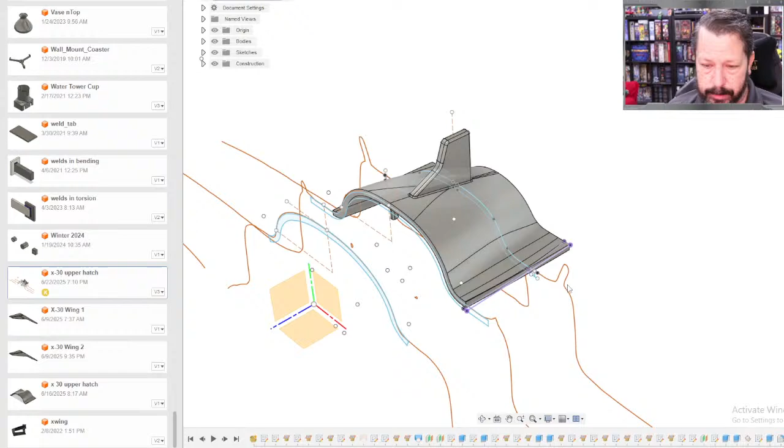So here's what we have. You can kind of see if I turn all of the stuff back on, there's what it looks like in the scan. So this was off. So I do have several profiles.

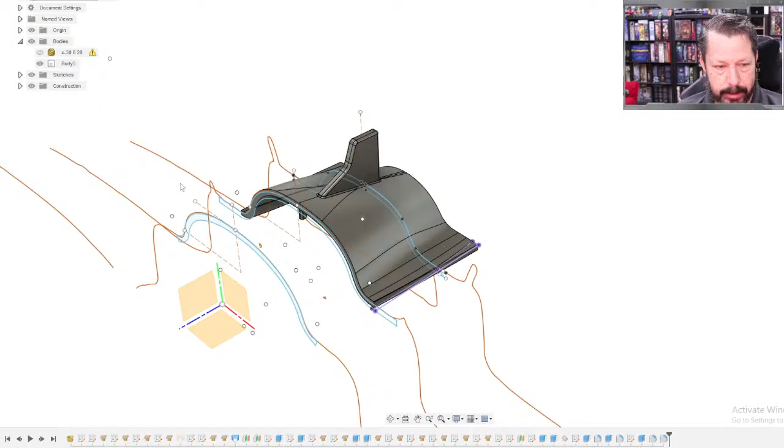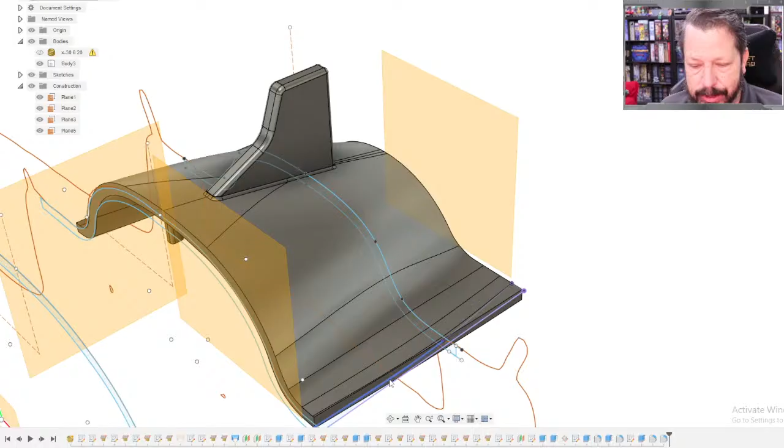Now I have chopped it down using a couple of planes to kind of chop it into size. Although it turns out that I didn't notice that these edges aren't actually straight. They're actually curved a little bit. So I had to go in and put this little surface right here to basically chop it at a curve instead of a straight angle like this plane would do.

I put the little wing on here. I had no guidance on that other than pictures, so I just kind of estimated what it looks like, and it looks reasonable. It's probably thicker than the original one, but that's okay.

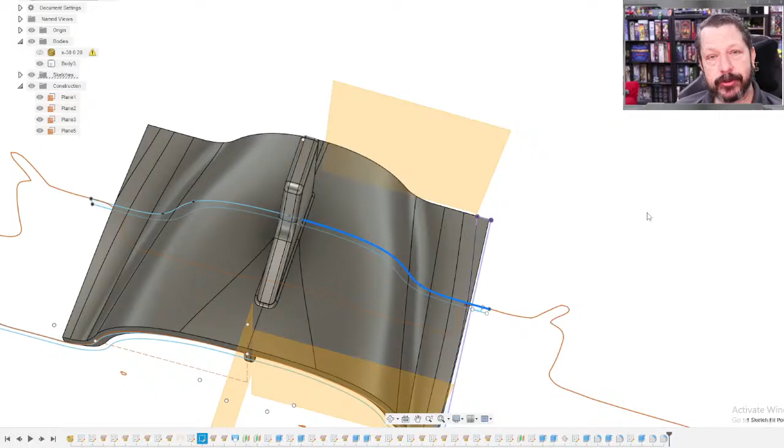And if I want to fix that bulge, then I added this profile. In the stream I was trying to do the profiles as a surface, and that worked, but when I went to make it thicker, to have some thickness to it, then it was not doing what I wanted it to do.

So what I ended up doing was the top line here - well, it selected the whole thing - but the top line of that is from the scan, and then I just offset it. I think I did 1.5 millimeters to get it the right thickness.

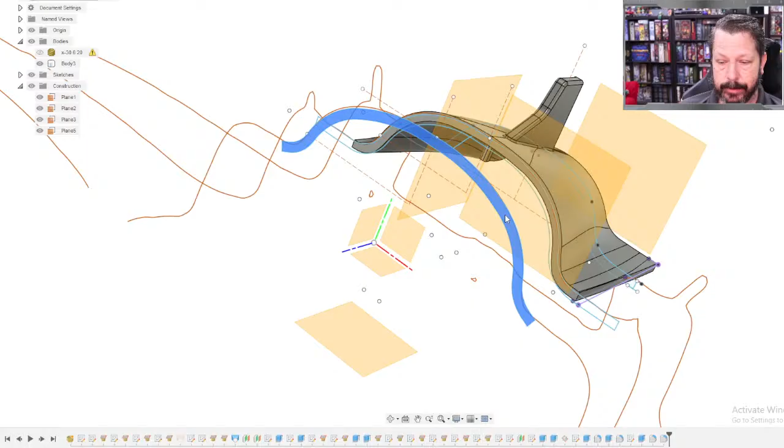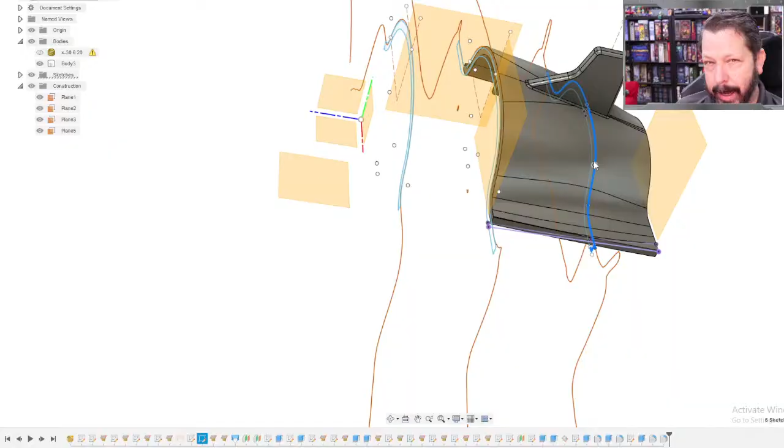And so I added this profile. Well, I can click part of it. There it is. I added this one just kind of by eye, and I went in and adjusted it - I could tell kind of what it should be just based on what the others were, and what the resulting loft looked like. But it looks like I've still got this point and this point a little too far out, and I need to manually move those around.

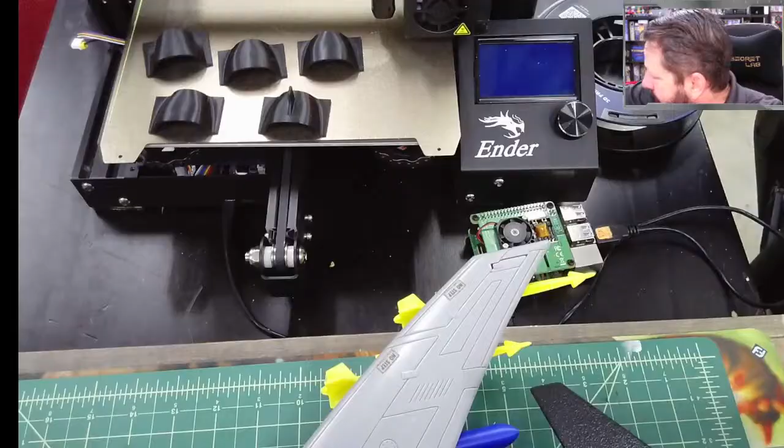So over here, there's the first one I printed, then got a little closer, the right size but no wing on it, and then I finally got this one to be where it fits and everything, but it's the wrong color, so I did reprint it in a different wrong color, but closer to the right color.

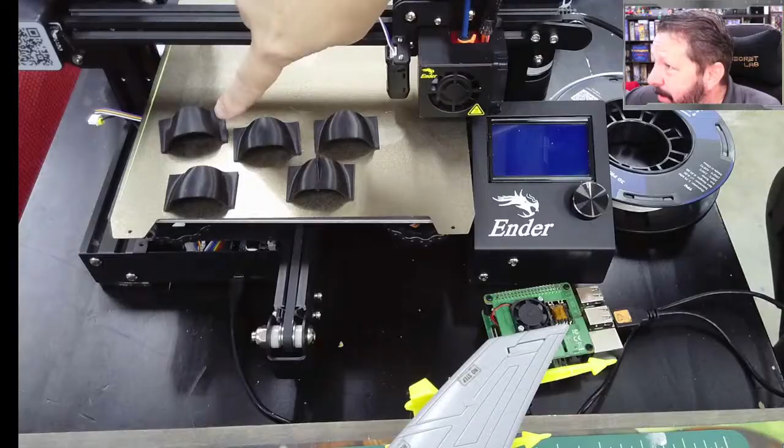So this is where we're at right now. It took about 5 iterations of going back and forth, mainly to try and get that right. You can kind of see there's a weird shadow in that groove, and then it starts getting better. One of these had straight sides, and then I had to curve it, then shrink it a little bit. So there's some iterating in there. Each print was only about 25 minutes or so, so it wasn't terribly long.

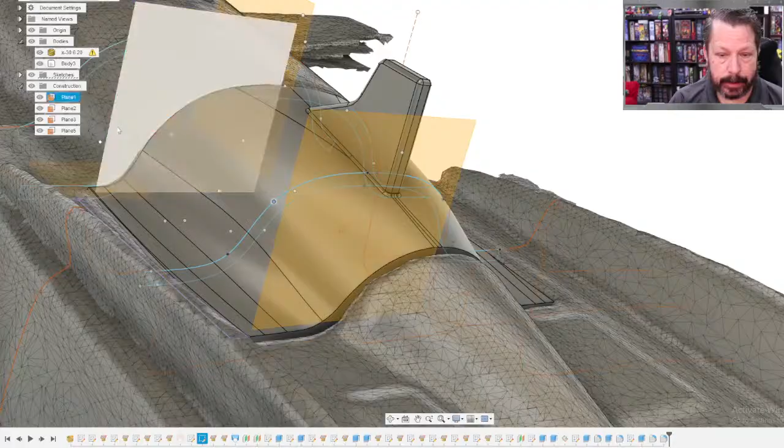So that was the process on that one. It was a bit more of a 'let's get close' approach based on having this scan data. You can see we've got the scan data for where that canopy is going to be too. It's a little rough, I might try using the more powerful scanner to get more accurate results. Just so we can see the difference, although there's a lot of detail here, there could be a lot more.

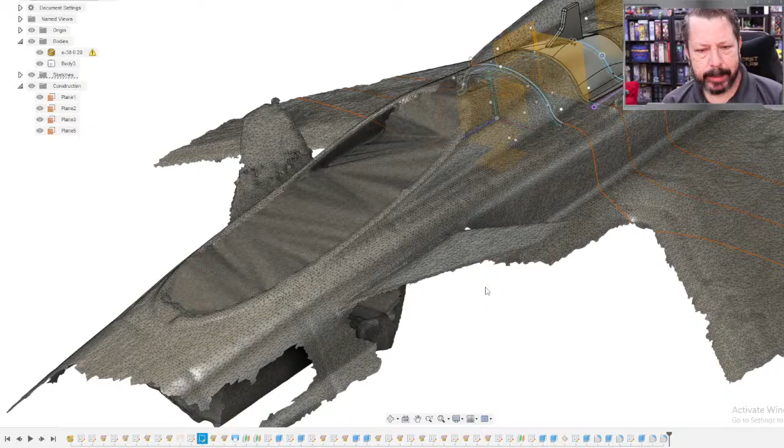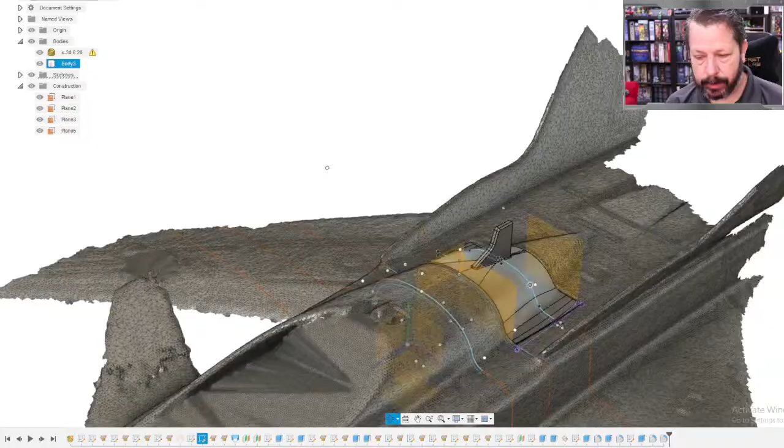That other scanner though, my computer struggles to run because it's collecting so much data at a time, and this computer is a little bit older - actually quite a bit older. So sometimes it struggles, but I might try to scan it and see if I can get a better scan, particularly for this area where it has to snap into the body. So yeah, not today, but offline I will go in and basically isolate this sketch. Which one is that?

16, I think. Go in and manually kind of move these points a little bit to try and get a closer shape to what I'm wanting, stuff like that, and see if I can get that bulge more under control.

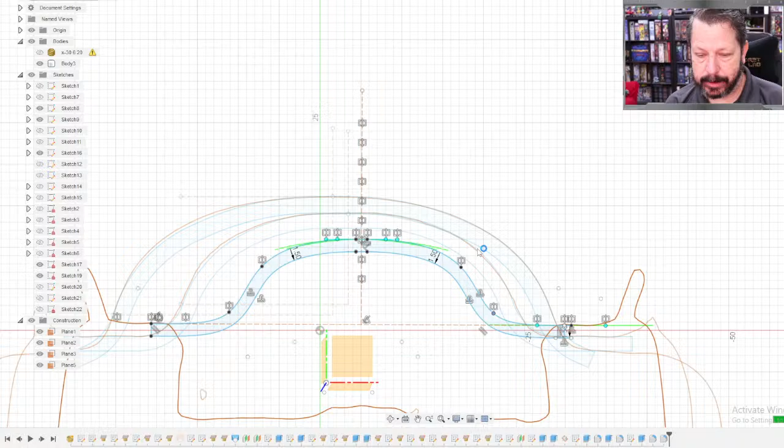Every time I do this, it's going to be a longer process because it has to recreate everything. So you can kind of see that bulge in this profile line, this curvature line I guess. If I could get it a little bit nicer, I think it wouldn't be so bulged out. Actually, that's not too bad, but you can see where these 2 points probably need to come in a little bit because there's a bit of a bulge right there.

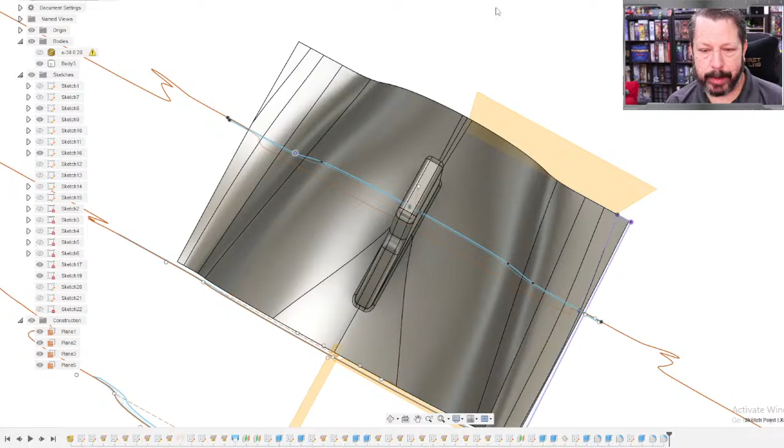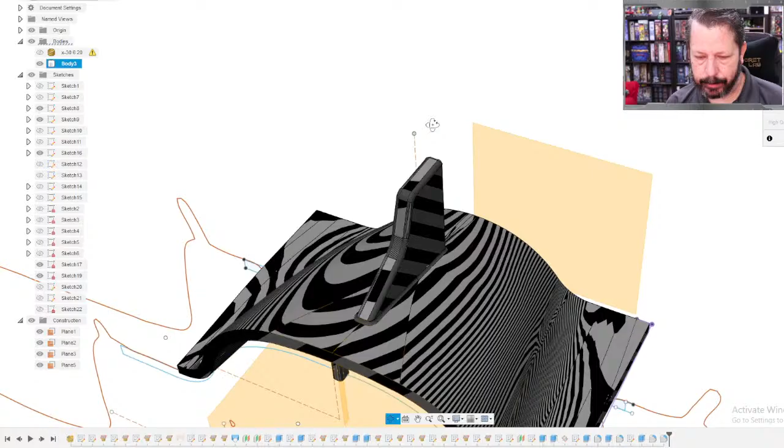When you're dealing with stuff like that, you have this inspect tool where you can put a zebra pattern on the body, which gives you an easier way to visualize it - looks like maybe horizontal stripes, though that didn't change the direction, they're in the same direction. You can kind of start to see what it might look like. I really wanted them to go the other way, but apparently they're not going to. Unless I can rotate the whole thing around. There are some tools you can use to see what looks kind of raised up right there - I think I need to move those points in a little bit.

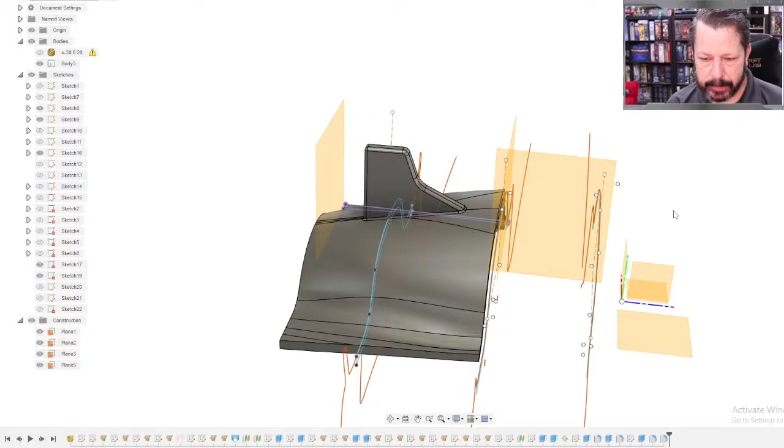All right, so we're not going to do that because that's going to be a lot of fiddling, I think. I don't want to just do that in the stream.

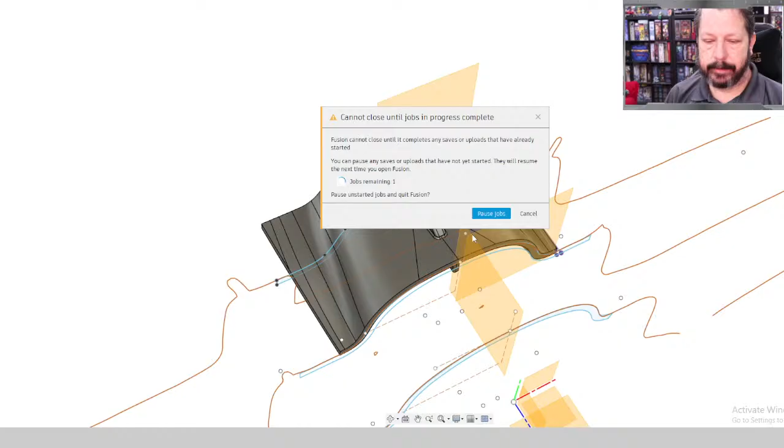But what we are going to do is check the chat. There's nothing over there. I'm going to close Fusion so I can get some of my computer resources back. It'll take a minute to close because it has to upload the save file since it saves in the cloud, so it's going to take a little bit. I think it's closing - there it goes. All right, let's go over here to look at something while it's going.

One couple things we do need to do - we did want to cover, what if you wanted to print a multicolor print but you didn't have an AMS, an automated material system that lets you automatically switch between colors without you doing it. I had shown, where is it at? I had shown this.

I had shown this guy, and it was a multicolor, one of the little flexi sharks.

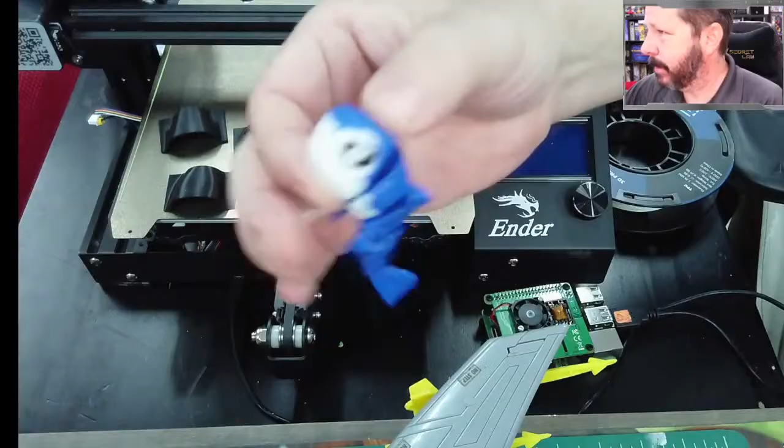This was all one print, but this was done on a machine that had a material switching AMS unit on it. So you could get multiple colors all in the same print, and you didn't have to do anything. You had to load the filament in once, and then it handled swapping out the filament.

So what if you don't have that? You can't do this kind of multicolor printing very easily if you don't have something that's going to switch the materials for you on an individual layer.

Either a machine that has multiple print heads on it - I've seen them with up to 5 print heads, and each one could have a different material, a different color, whatever. Those are on the more expensive side.

Or the AMS, where there are 4 rolls of filament and it automatically switches the rolls to whatever is needed at the time. That's what this one was.

There's another one I don't think is a thing anymore. It was kind of finicky, but it was one box you added to your printer, and it would splice the filament together - cut it, weld it together with heat, and send it through the nozzle at the right time. Whenever it needed to switch filaments, the new color would be welded onto the old color. That machine was called the Palette, and they had maybe 3 iterations of it, and it did work, but it required a lot of synchronization between the new filament coming in.

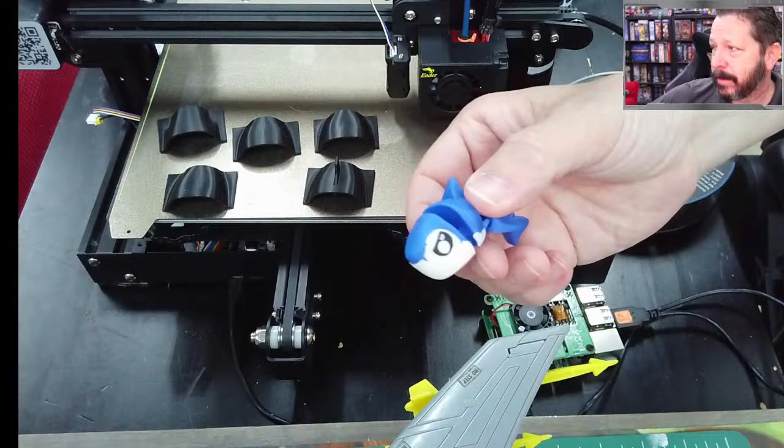Well, it's all one string of filament, just patterned into whatever color needed to be there at the time. It required a lot of synchronization, and it was a little clunky and a little expensive. With this printer, you could get it with the AMS for the price of that one add-on for another printer. So I think they kind of abandoned that approach and switched to approaches like this, where one unit houses your rolls of filament and sends them at the right time, or the type of printer that just has multiple heads.

But let's assume you don't have any of that. You can still get some types of multicolor.

Here I've got a little step-by-step for how you can make your own multicolor if you only have a single nozzle printer. This works best with things like logos or text on a plate - you know, you're going to print a nameplate or something. It works best in that kind of thing.

You find the image you want to convert or create the image, and again I'm going to use Photopea because I don't think it's open source, but it's free to use, it's online, and it's mostly like Photoshop on the basic level tools anyway.

And we're going to vectorize it again, because the process I'm going to do is drop it into Tinkercad. Again, you can use other processes - this is just one way to do it.

So we're going to get that SVG file - the vector graphics format - and bring that into Tinkercad, make a 3D design, and import the SVG that we created in Photopea. We'll have to rescale it because there's no real scale that translates from a picture to an SVG file.

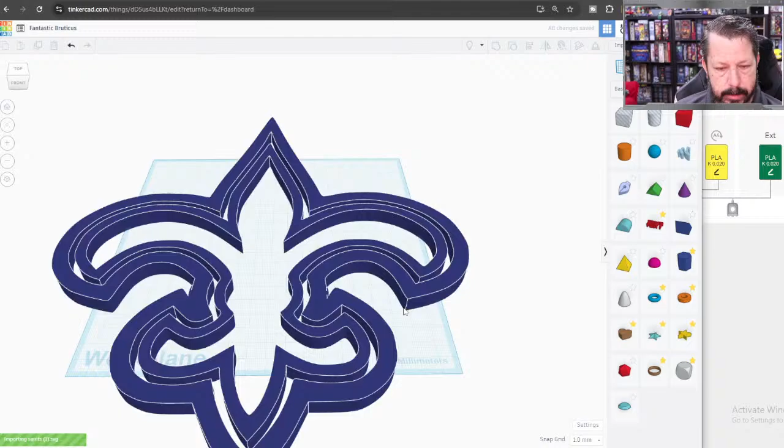Import, and we're going to find that vector file, which is this one. There it is. And again, you could try to size it, we're not going to worry with that. So yes, it is way too big. So we're going to select it, hold down Shift, and kind of manually get something more reasonable.

We'll also be able to scale it in the slicer if we want to, depending on how big we want this thing to be. So this would be kind of interesting to print by itself, but all the places that there are no material is just kind of empty, so it would really just be an outline.

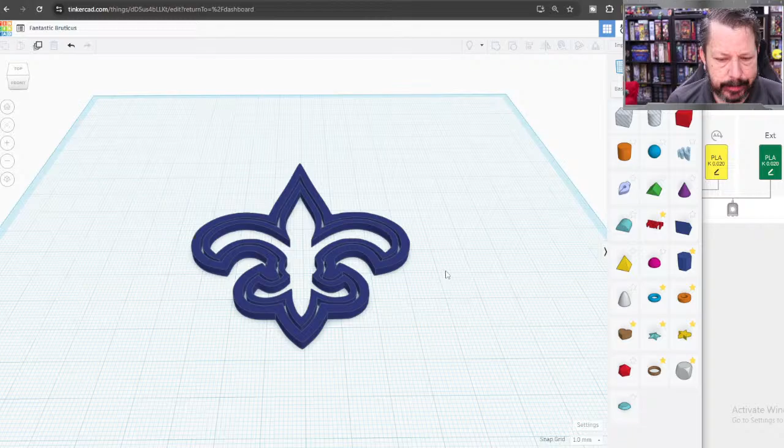So to fix that, we'll select it. We will duplicate, which is Control D, or I think maybe this copy, I guess that's also the same thing. We're going to do duplicate though, Control D, so that's basically copy and paste. Now there's 2 of them, they're on top of each other.

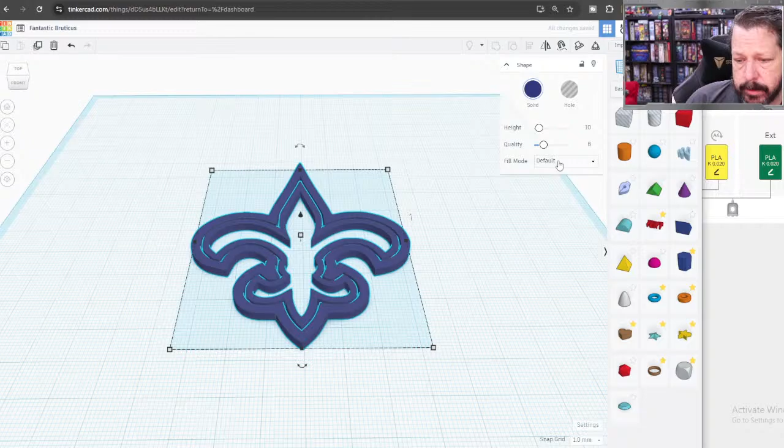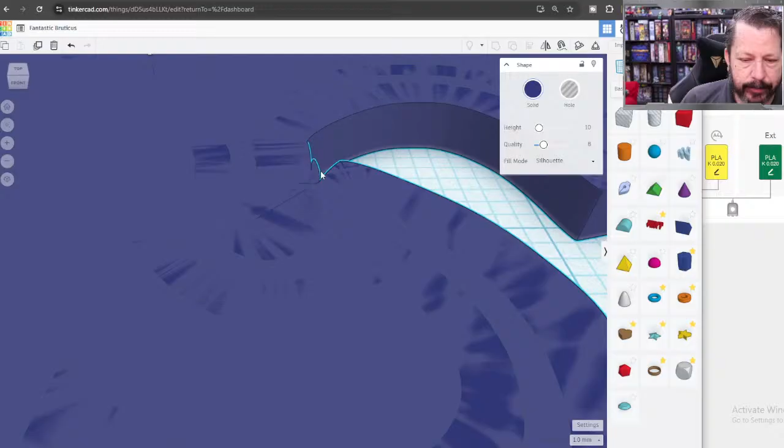And that second one, in the fill mode, we're going to change that to silhouette. There's several options here, and what that'll do is take only the outside part, and everything inside is filled. Now I see I've got some weirdness, a little jaggy thing right there. That's an artifact from our vector conversion. Maybe we could have fixed that, but I think it's so small it won't matter.

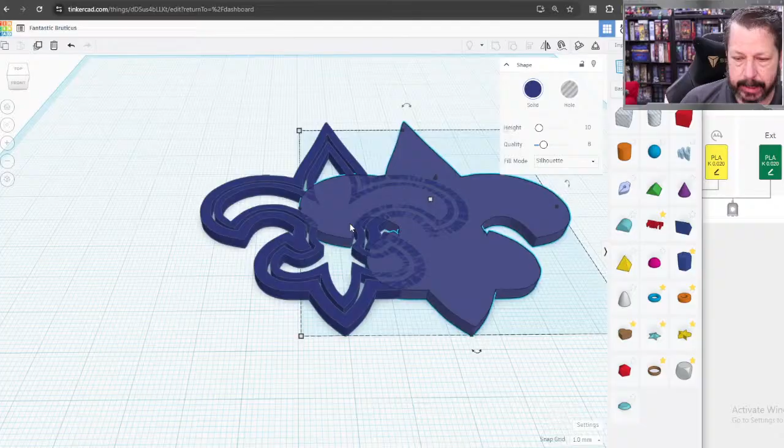So now I've just got one big blank, but I could go in here. Actually, there's the two of them, two things stacked on top of one another. One is the solid, and the other is the outline. Let's line them back up and make them...

I am going to print these, and I'm thinking I'll print them at 0.2 millimeter layer heights. So let's make this, instead of 2.64 tall, let's make it something reasonable for an even division by 0.2. So I'm going to make it 3 millimeters.

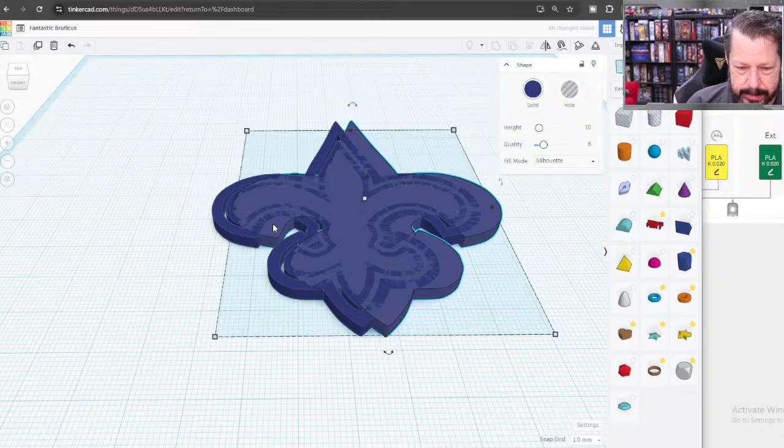And then let's pick the one that's solid. Oops, let's unselect them. Let's see, that's the solid one. Let's make it also divisible by 0.2, since that's our layer height we want to print at. Let's make it something smaller, 1.6.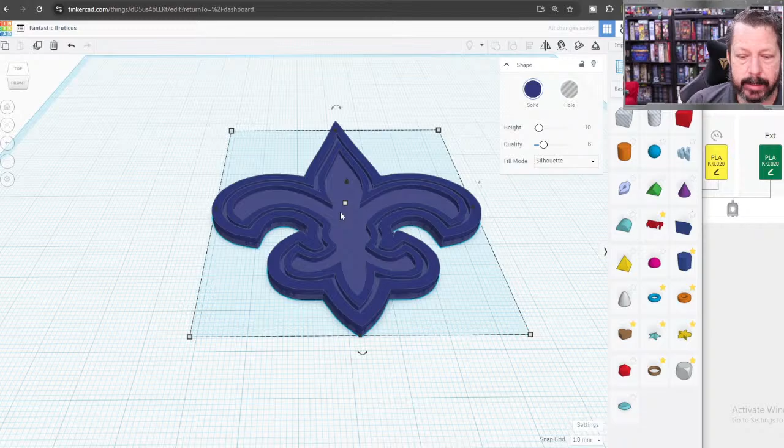And now when I line them back up, that's kind of what I'm thinking I'm going to get. If I change the colors, let's say this one is maybe a black color, and this one is a gold color. So somewhere in there, when I line them up, that's what my print's going to look like.

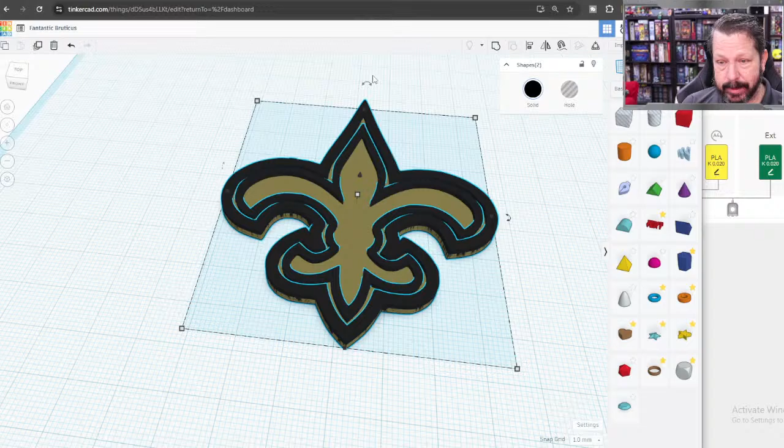Right now they're two separate files, so I am going to Control A to select everything, and then I will group them. This will turn them all the same. Oh no! Yeah, it changed them to all the same color, and that's what it will look like.

Now we can export that as an STL file. Oh, I should have opened Cura. I haven't opened Cura. Let me get it going.

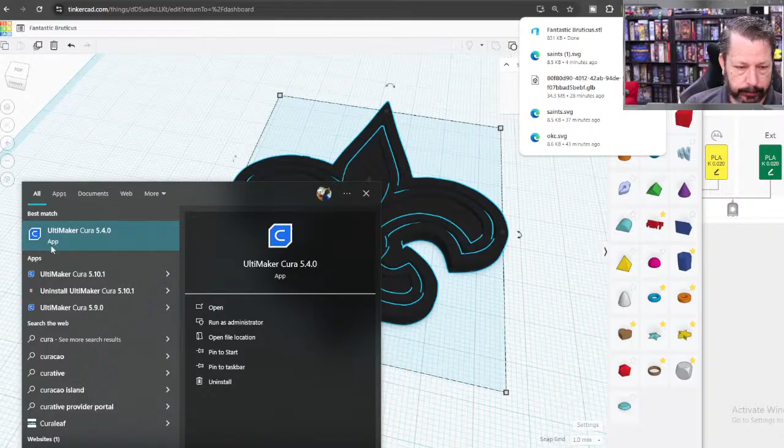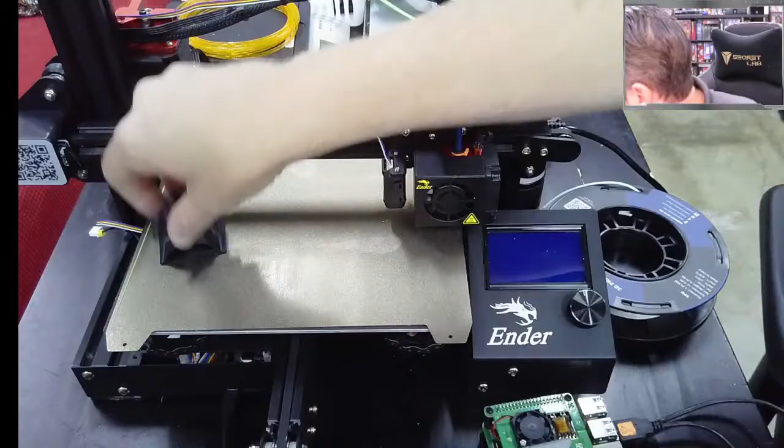Let's prepare it to actually print. Now my printer over here, the print material in it is broken, so we're going to have to unload that, plus it's green, which is not really one of the colors we wanted to print. I don't know if I have a filament that looks like it's going to work here, but all of them will work, though some of them will not look like the Saints logo.

So we'll get that running and we'll change out this filament. Cura is still loading.

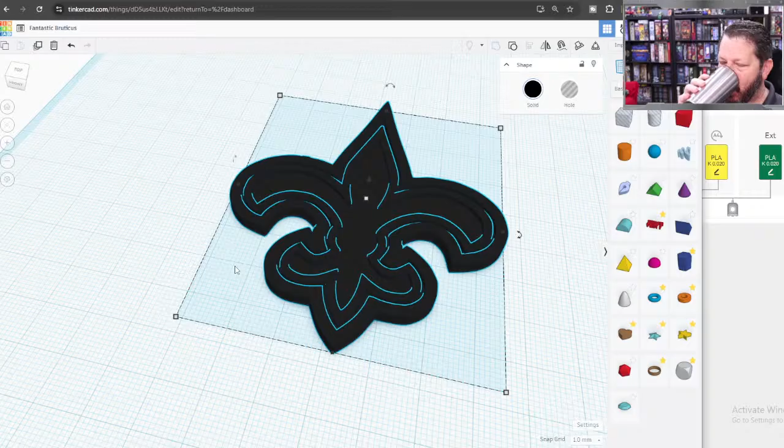All right, apparently we can update. We will do that later.

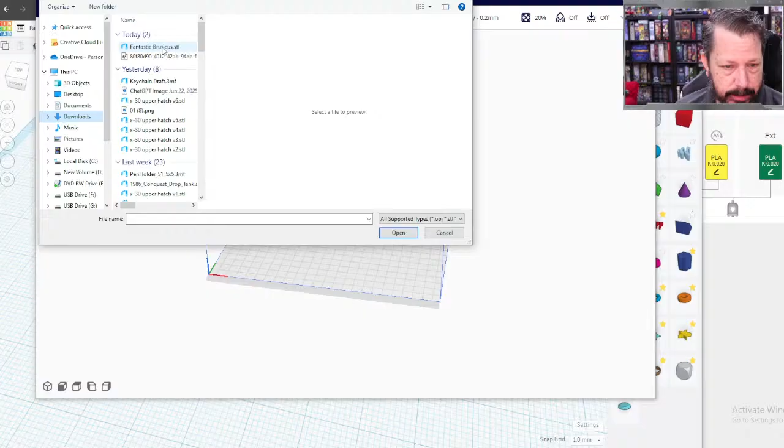So here we need to bring in wherever I saved it. I don't even know what it was called. What did it call it? Fantastic Bruticus, we got to find Fantastic Bruticus. Must have put it in downloads. There it is. All right, so there's our little print.

Let's make sure we're actually printing at 0.2, because that's what I was thinking when figuring out how thick to make it. This size looks kind of reasonable. Two walls is fine, top layers of three each is fine, infill is also fine, that's a PLA temperature. We could probably print a little faster, but we'll leave it there. It does need cooling because it's PLA, and we'll use that skirt. So that looks okay, let's slice it.

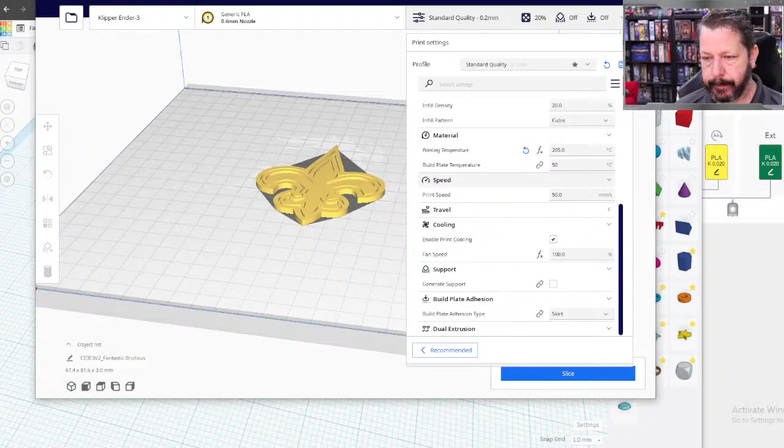And preview. It says it's going to take an hour. Let's preview it. And this is what... oh, I think ironing is turned on. Let's turn that off. Ironing would be interesting, but it's just going to make it take even longer. So now let's slice it.

So 51 minutes, all right. So if we leave it like that, it's going to print our 15 layers, because we wanted it 3 millimeters tall with 0.2 millimeter layers, so that's 15. Now the first layer is layer 1 — that's going to be important later on. There is no layer 0 in Cura.

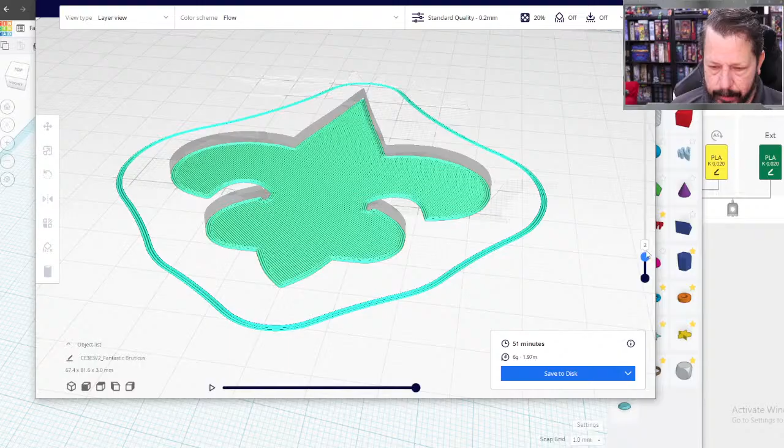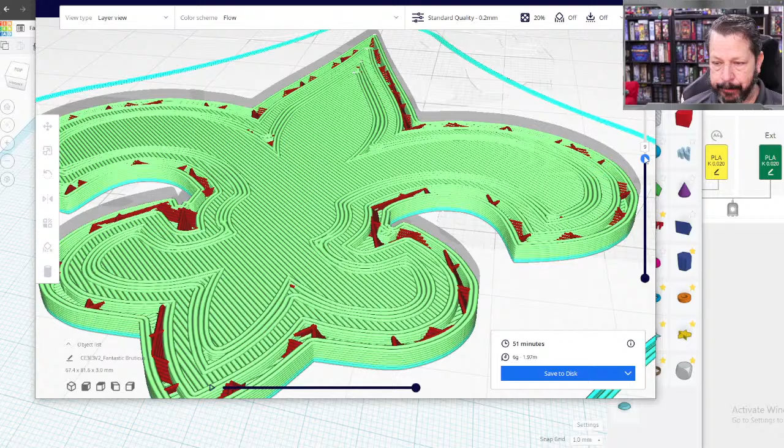And then what we're looking for is where it starts printing the other color. So it looks like right there is the first appearance of the other color, that little line. You can kind of start to see where it's doing the raised part. So that's at layer 9 if you start counting at 1. Layer 10 through 15 are just the rim on the top.

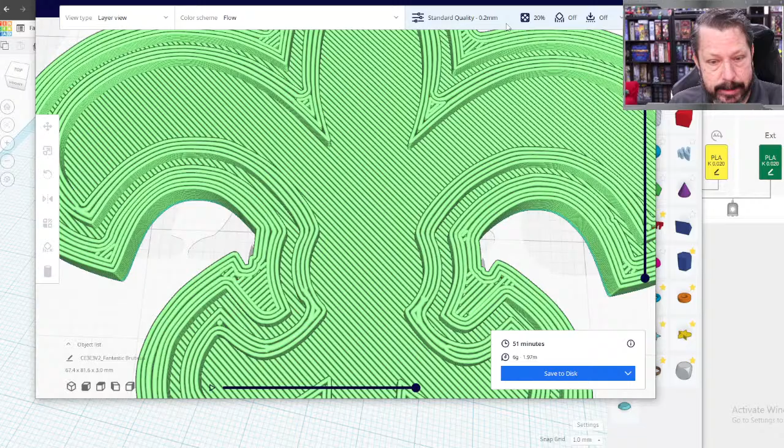If for some reason you have some features that are not being picked up - I don't really have any really thin features on here, but maybe you've tried to write some text and it was kind of small and it doesn't slice - what you can do is look for the word thin in here, and there's this option, print thin walls. Select that and it will force all the stuff to be printed even if it's smaller than the slicer thinks.

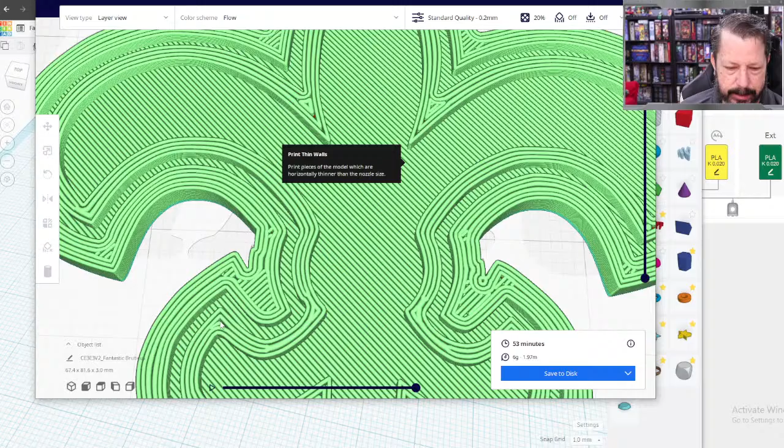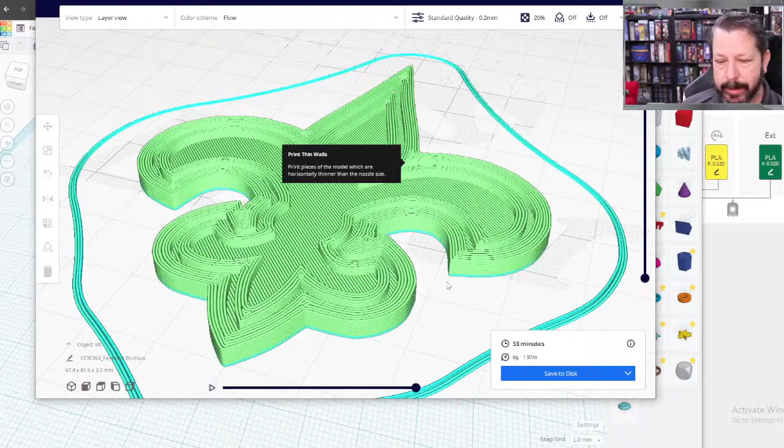The printer can actually do. So in this print, it doesn't really change anything. There might be some differences in these corners possibly, but sometimes you've got features that are too small and they don't show up in the slice, because they're smaller than your line width. So if you're having that issue and you want those to print but don't want to change the line width, look for the print thin walls feature and that should pick them up.

I don't think I need it on here, so I'm going to turn it back off. In general, you don't want it on, but sometimes you have to have it to pick up some of those thinner pieces. Alright, looks like our printer might be ready.

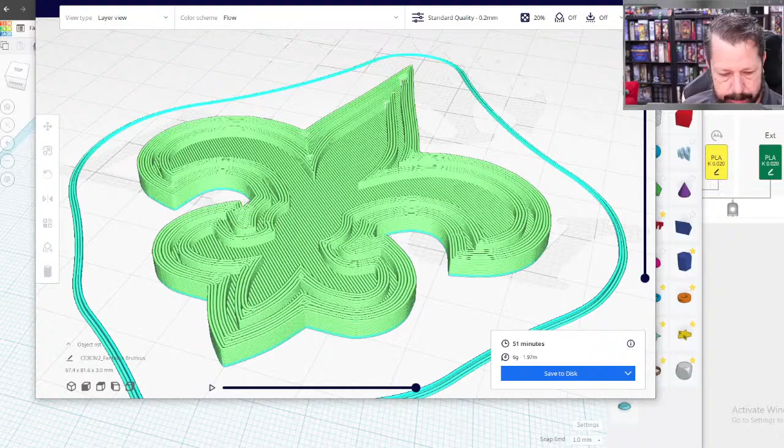Let's see if we can get connected to it. Remember, this printer's running Klipper, so there are some things I can do on the printer panel itself over here, like I could go ahead and change the filament temperature here so that I can remove it.

Well, let's see, we'll just do it here. There is a preheat PLA, but I'll just manually change it to something that will melt PLA. Oh, hold up, I've got to connect the printer.

While it's heating up, let me quickly see if we've got some filament that will work as far as colors go.

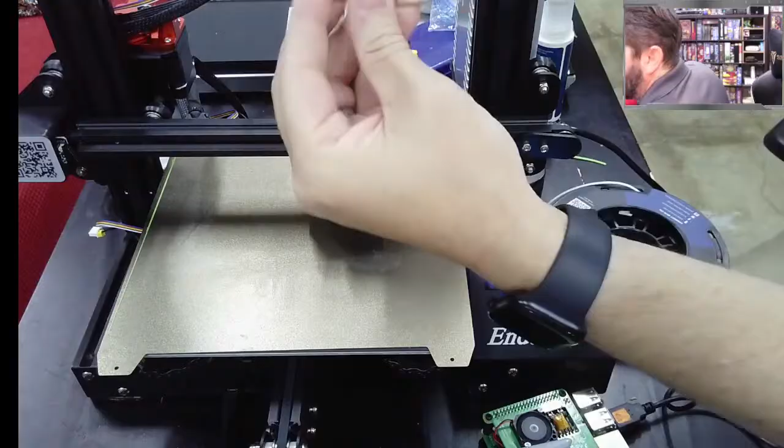Let's load up this. So typically what I do is on the end where we're at, on the end where I'm loading, I'll cut at a pretty steep angle, something like that, to give it a sharper point that makes it easier to get into the feeder.

Alright, now let's extrude, I don't know, 50 millimeters maybe. Actually, let's move the Z-axis up some, so it's not sitting right on the bottom. There's green in there, and still green in the nozzle, and I want to purge a lot of that green. Alright, you can already see, I don't know if you can see on the camera or not, I can see in person that there's the silk color coming out. So we'll let it purge a little bit.

Now we're not ready to print. We actually haven't even sliced it yet. Or well, we did slice it, we didn't save it. So over here, right now, we could download this, save it to disk, which we're going to do, and we'll save it on the desktop. Let's call it something that I can recognize, though.

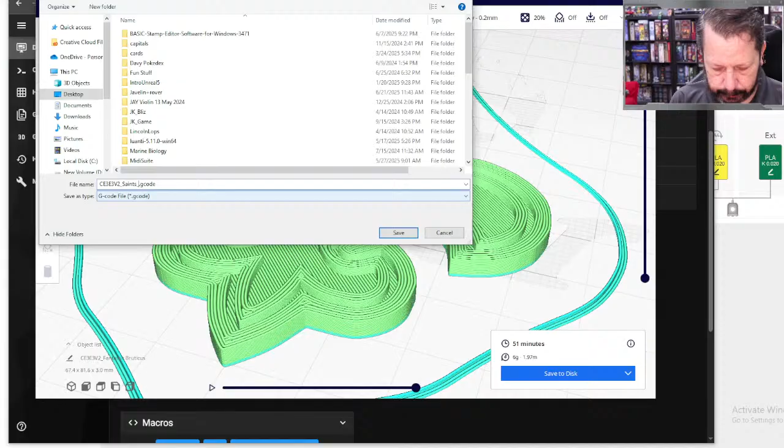And this is the G-code file. Okay, this does not tell it anything about changing filaments. There are extensions that will let you go in and they will add in G-code, although all the ones I've ever tried for this process don't always work. Like they use a G-code command that the software doesn't recognize or whatever.

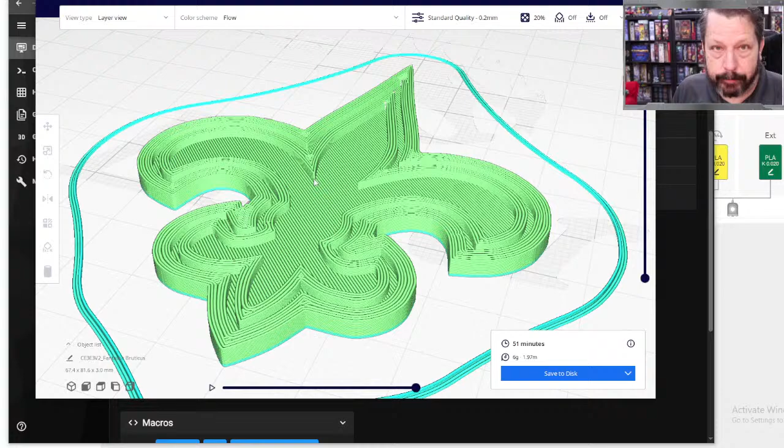Yeah, so yes, PLA. So it's funny you mentioned syrup. The comment, in case you didn't see it, one time when I was changing filaments, my printer started to smell like syrup. It was going from PLA to PLA. PLA is made from corn, and it does have a syrupy smell, like corn syrupy smell. So PLA, polylactic acid, one of the main ingredients is derived from corn, and it will smell like syrup.

Sometimes it smells like an oil type of thing, like corn oil or something. So it's not bad. It probably means it's extruding really fast, or you've pushed a lot of filament through, so you're getting more of it at once. But no, PLA kind of does smell like that. In fact, I noticed, and obviously you can't, because you can't smell what I smell right here, but this smelled that way too. So no, it's not bad. That's kind of normal for PLA.

So there are, like I was saying, extensions that will, you can just click a button and it will add the G-code to tell the printer to change colors. Like I was saying, those tend not to work for me for whatever reason. Maybe I don't use them the right way.

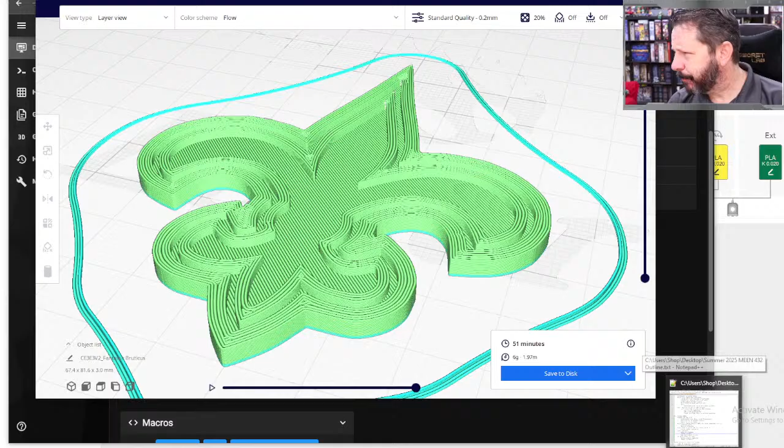So what we're going to do is go into, I just saved this to the disk somewhere, so on my computer. We're going to load that up as G-code as a text file. I'm going to use Notepad. Let's see. Let's open it. I'll get it on the screen in a second. I just got to find it. Where I put it.

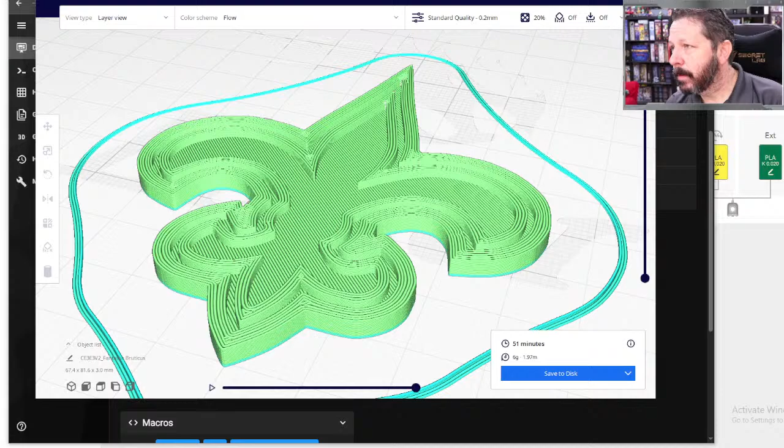Oh yeah, it started with CE3E3V2 Saints logo. There it is. Okay. Yeah, we're on the screen. Oh, there's another comment.

Smells like pancakes. Yes, it really does, at least most PLA does, except for the yellow. The yellow to me smells horrible, and it's a little obnoxious. Anytime I print yellow, I move it away. I assume that when they make filament, it's pellets of plastic, and to color it or add features to it, you add different pellets, so the colorants, and they're super saturated colors or whatever. So you might add one pellet of colorant to, I don't know, 1,000 pellets of base plastic.

I don't know what the ratio is, but for whatever reason, the yellow colorant is not one I like to be around when it's printing. The others tend to smell like syrupy oil kind of stuff.

Here's the logo G code, so you can actually read this. It's maybe 50,000 lines of code, but it's all readable. G code is stuff you could technically write yourself. All of these with a semicolon are comments. Then some of these are labeled with M instead of G. The M's are typically machine codes, telling the machine some kind of setup thing, like heating to a certain temperature or displaying a message. The G codes are telling it to go to a certain location, and they're when the print head is moving around for the most part. That's kind of how the G code is set up.

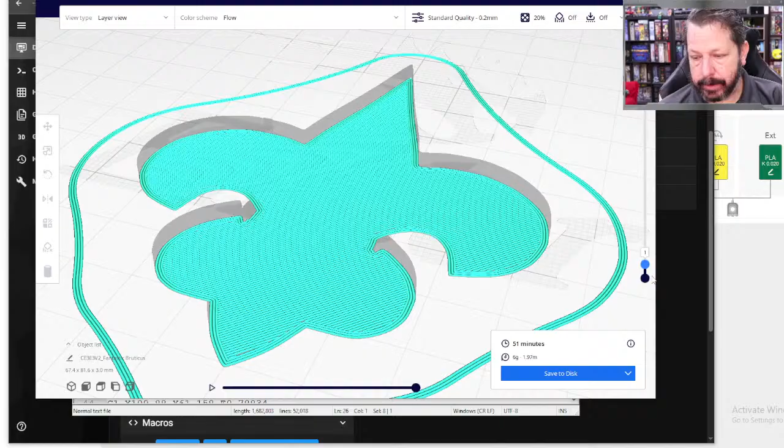Here are our 15 layers. Here's one detail: when we were in Cura, we scrolled to the first layer and it was labeled layer 1. But in the G code, the first layer is layer 0, so things are off by one layer.

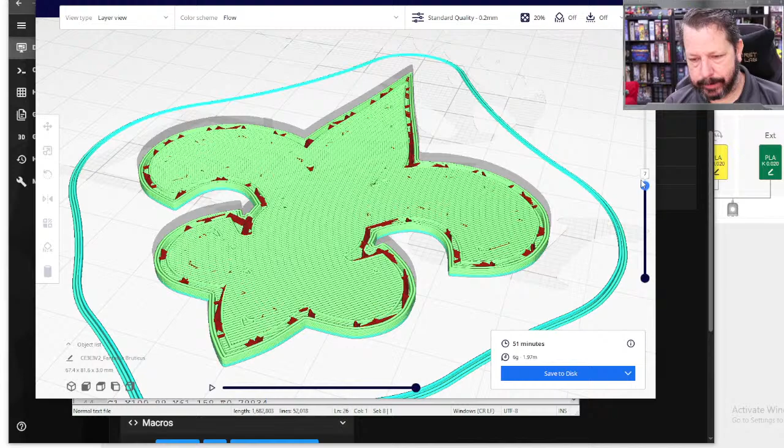We wanted to change at layer 10 maybe. Layer 9 looks like it starts, and layer 10 is definitely the other color, so maybe we'll start at layer 10. Since layer 10 started counting at 1, in the G code that's layer 9. We could scroll until we find layer 9, or do Control F and look for it. There's 2, 3, 4, 5, 6, 7, 8, 9 - so that should be where we want to switch, since we started counting at 0 in the G code.

So there's layer 9. Before we print layer 9, all of this is telling it to print the different things for layer 9.

What I've got is on Canvas. Over here, I've got this code already written, and this is kind of generic code for Marlin, the firmware your printer's using. If you have access to Canvas, you can just cut and paste this - it's on today's class thing. Otherwise you have to type it in. We'll paste it in right here and separate it out. Now it's formatted way differently, but we could clean it up just to make it not quite so weird looking. The formatting doesn't make any difference at all - well, it would make a difference if I erase the comments or the comment semicolon. I'm just trying to get it all... not that, got in too big of a hurry.

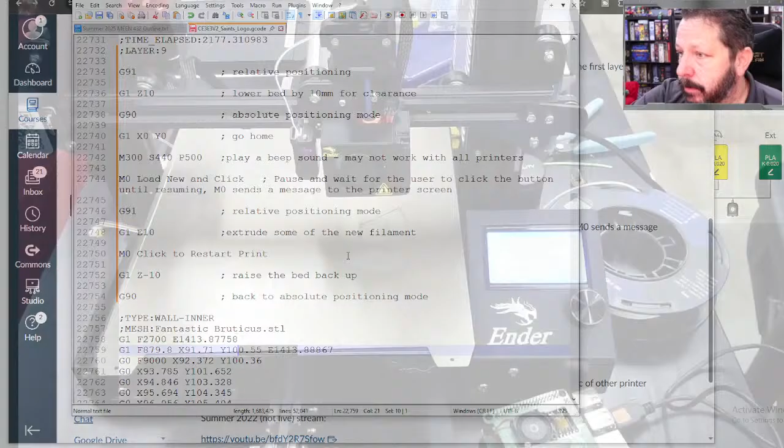You could alternatively sit at your printer, wait for it to finish as much as you think it needs to, and then in the menu there's a change filament button, and you can just wait for it. The only problem is you have to be sitting there watching it and hoping that you catch it at the right time.

So back over here, we just inserted this for our change filament, so we could write a little comment: change filament.

Save this again. I am working in Notepad++, but you don't want to load your G-code into something like Word or WordPad or an actual word processor, because when you save it, it's possible it will add in all sorts of meta tag data, like when you saved it and who the author was. That's going to really mess up the G-code, because the printer doesn't know what to do with that stuff. That's why I'm working in Notepad++. Notepad would be just as fine, but I recommend Notepad++ because you can do a lot of other things with it.

Editing code, if this were some language, it would be formatted more like code versus just G-code, which is more or less straight commands.

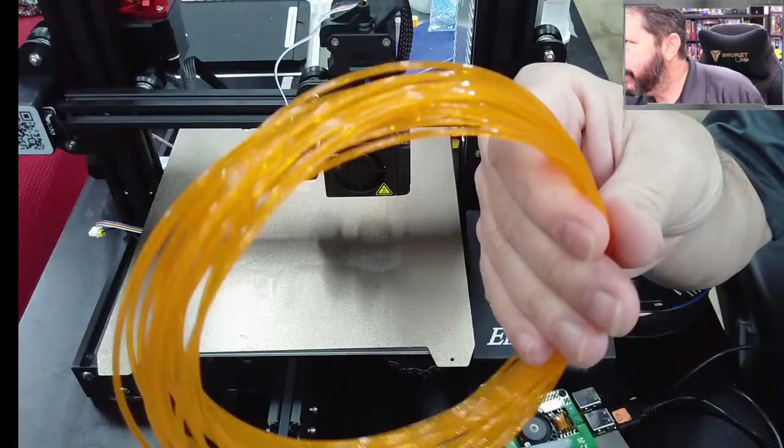So in the meantime, let's look at this - I wanted to show this filament here. This filament is just a little sample, and it is sparkly. Let me see if I can focus on it. I don't know.

Yeah, maybe you can kind of get the idea. There's glitter in the filament. So these are pretty cool, they come out neat and all. They're usually PLA, some of them are PETG.

What I want to say about this one, though, is that if you're printing filament with glitter in it, we've already talked about the hardened nozzle thing, but these filament types with glitter in them, you almost definitely want to switch to a larger diameter nozzle. This one has a 0.4 millimeter nozzle in it right now. I'd be hesitant to print this kind of sparkly material on that size nozzle, because it's too big of a risk of the glitter getting hung up in it and not extruding. So if you want to print them, they're pretty neat filament types, but switch to a larger nozzle, 0.6. We did a nozzle change a couple weeks ago, so you can go see how that works.

Not sure what my printer's doing. It just stopped right here. It may have already run into some G-code it didn't like. I don't know if it pre-processes it, and I think it might have.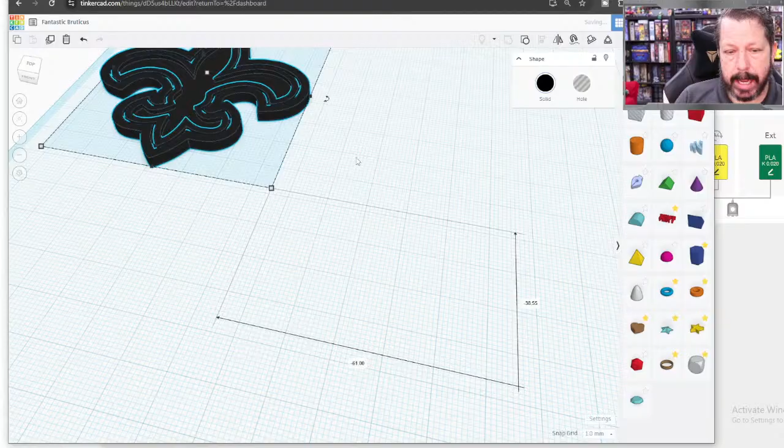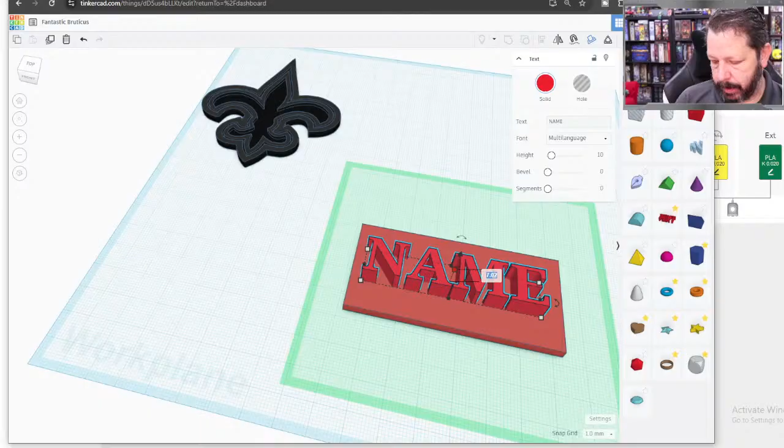All right, while it's doing that though, I did want to show you this. Maybe you don't want to copy a logo, you can just do in Tinkercad, you know, manual, there's 3 millimeters, make it whatever size you want. There's a text tool, and you can just put whatever text you want on it. Make it however thick you want it to be, maybe another 2 millimeters. And you can center these things. Here's the little align tool, center and center. And group them together, and so you can make your own.

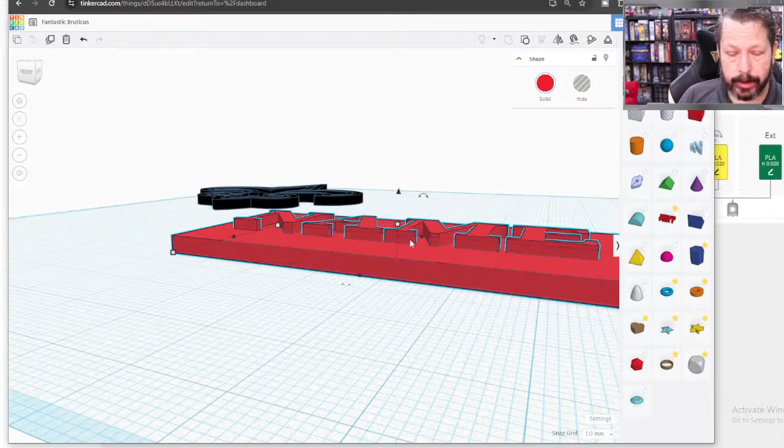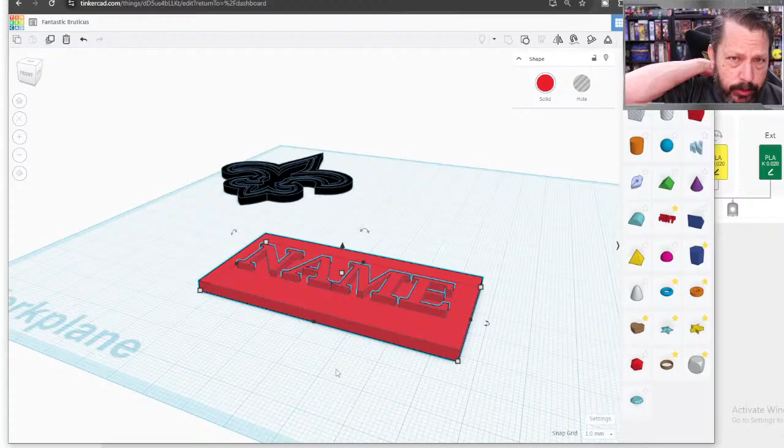The main idea is that you've got different levels of where you can change filament colors. There is one other tool that I'll show you later, not later today, but later in the future, that will print very multicolor things, but it's a little more setup. It's called HueForge, if you want to look at it ahead of time. But, well, I guess we can search it now.

The other thing I wanted to show you, I don't know if you've messed around much with any of the AI mesh generators. You've certainly done an AI image generator at some point, or at least seen them, but there are AI mesh generators too. Maker World has Maker Lab, and some of these you can make little Pokemon style monsters, or make a statue from a picture.

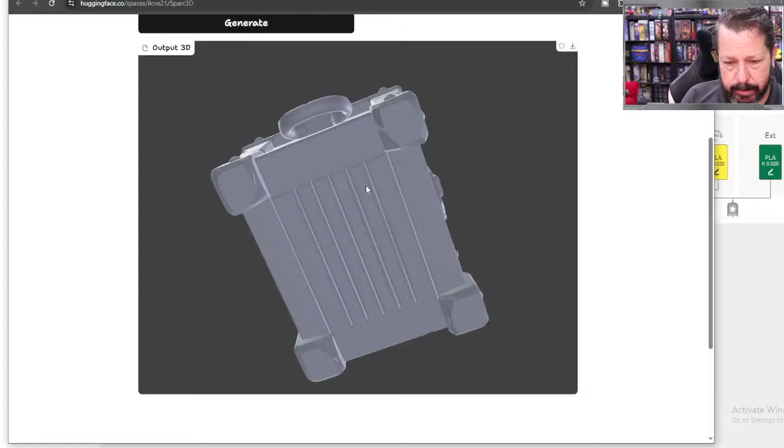So this image is just created from maybe ChatGPT, I think, is the one I used. I asked it to create an image of a treasure chest on a white background, and that's just what it spit out, in a fantasy environment. I don't remember the entire prompt, but it spit out this picture. Then I loaded this picture into Sparc3D, and this is the model it generated. That's a really nice model.

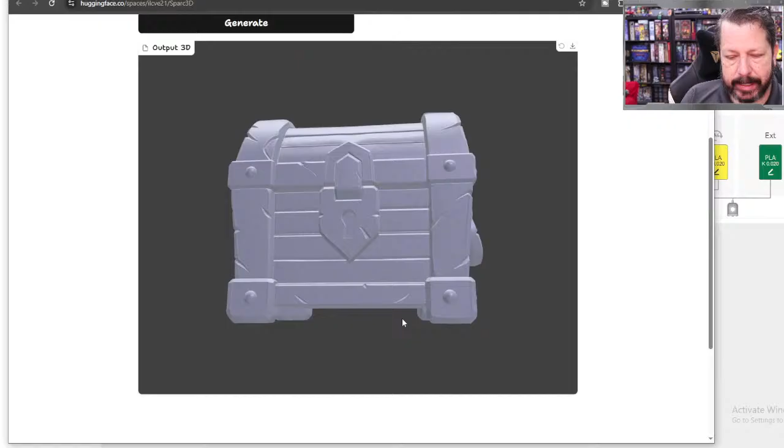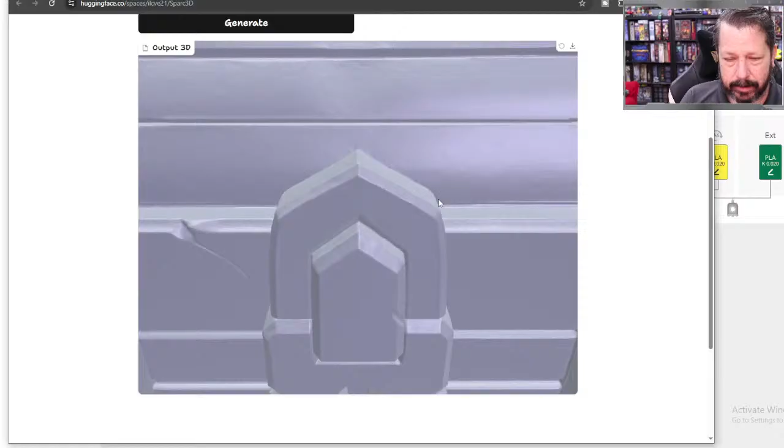It's not 100% printable—like, you've got this little buckle over here, the handle, that would be hard to print, you'd have to change that. You've got these feet, which look neat, but they make the bottom raised up, so that's not ideal for printing. This little overhang right here probably is going to droop, so it's not set up 100% for printing well. You'd need to modify it, but that's a really good model—it even picked up some of the texture for the wood in there. So this is a pretty high quality model.

Right now it's in the kind of beta phase, or alpha phase maybe—probably beta, I don't remember what it said.

The general process is you create some image, ideally on a white background so it's not getting confused. What these do is—I talked a little bit about photogrammetry, where you take a bunch of pictures. I showed you the Lady of the Mist—I took a bunch of pictures around it, and the software used all those pictures to figure out what the object must have looked like from all these different angles. So what these are doing is taking one picture, then using AI to generate the other pictures, and running that through an algorithm, sort of like photogrammetry.

Now this one is more advanced. If you read the whole paper, they talk about what they're actually doing. But this one is giving you a lot more detail than any of the other ones currently, and it looks pretty nice so far.

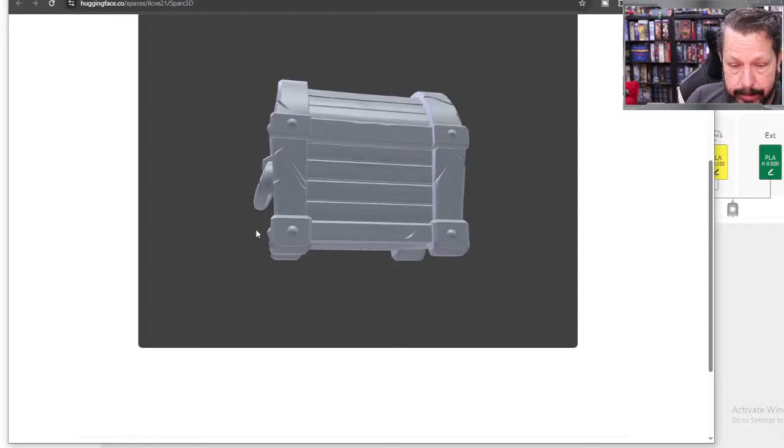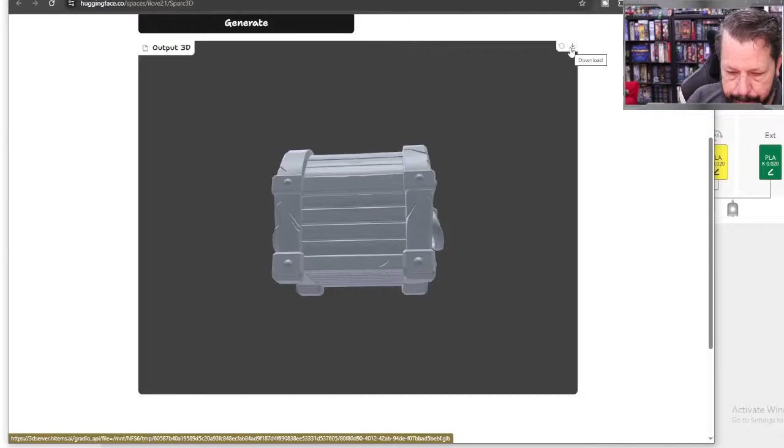This generation took, I think, about 3 minutes—so between me loading up the picture, hitting generate, and then 3 minutes of processing to get this, and then it lets you download it. I haven't actually downloaded it—it's going to be a GLB file, so not everything opens GLB. It's similar to, I think, what Mesh Mixer can open.

I'm not 100% sure it can, but let's see. I have downloaded this, so let's see. I don't remember what it was called. Where... in downloads, I guess. Yeah, it doesn't show up.

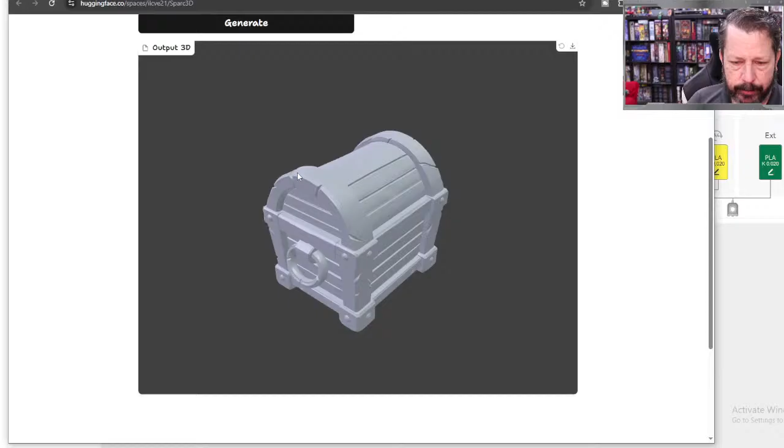So GLB is not a file type that Mesh Mixer can open. You would have to use a different piece of software to actually open this file, or convert it to an STL file. But there are pretty good pieces of software out there.

So you can generate all sorts of models. It doesn't make them specifically for 3D printing though, so there could be cleanup you need to do, or you have to add support, or very carefully prompt your image generation so it creates more printable models. Like this one, you'd have issues with some of these overhangs, I think, or if printed in resin, where that's a little less of an issue, though you still have to deal with support. I just wanted to show you this because these AI model mesh generators are getting really pretty good.

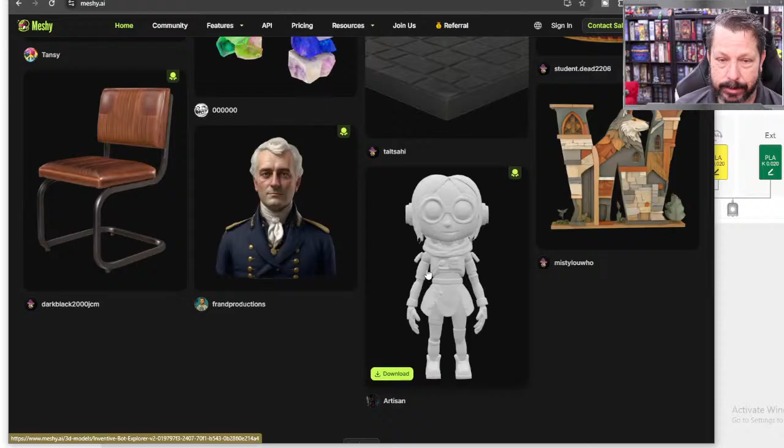Meshy, not too bad, whichever one, wherever it's at. I don't know. Oh, there it is. But there's a level of difference between these models, the geometry behind these models versus the geometry behind that Sparc model. You can kind of see there is some detail here, but it's not the same level of detail as what Sparc, or Sparc3D, whatever they want to call it, is generating.

So if you're interested in creating some models from scratch, this would be one of the optional assignments you could do. You could use one of these tools to generate some kind of model and print it.

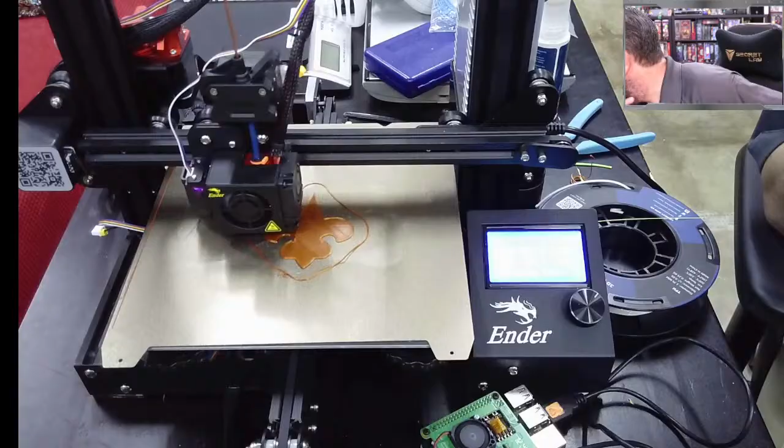All right, let's look at our printer. It's still going. It hasn't gotten far enough along to change filament, so I don't know what it's going to do when it gets to the G code we inserted on this particular printer. On most printers, it will pause, put a message up, even play a beep sound telling you it's ready, and then you'll have to manually remove the filament, put your new filament in, and it carries on printing. But I kind of suspect this one's just going to stop, or maybe it just blows right through all that G code we inserted and we just get a copper silk logo with no color on it at all.

All right, next time will be Wednesday. I think on Wednesday... I'm not sure exactly what I've got planned for Wednesday. Oh, I think it's this.

So part of our restoration of this guy is the front landing gear. Part of the front landing gear is tires, and these are rubber tires. So we're going to have to start printing a flexible material.

So I'm going to use... now this is the wrong color. I do have the right color, but this roll was smaller. So this is TPU, a rubbery material. This one is more the stiffer kind of TPU.

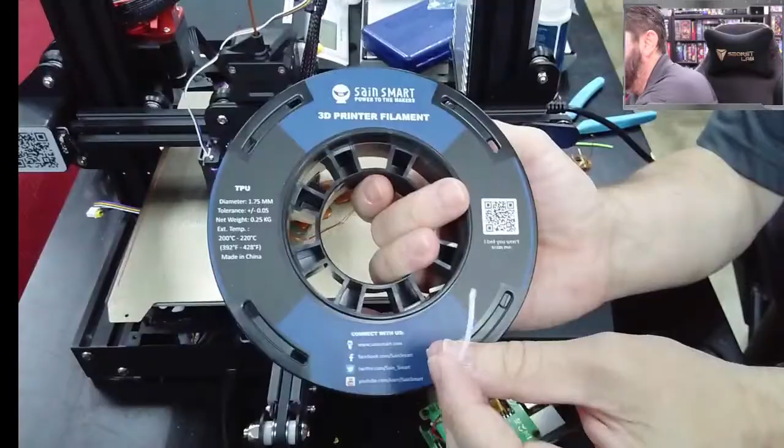But they make much more flexible stuff. It takes a little bit of tuning to get your printer to print TPU the way you want it to. In this printer we've got the direct drive setup, so it's going to be better at a flexible material because it doesn't have a very long filament path for the flexible material to get wedged in or be a spring inside that filament path. You can print TPU, particularly this kind that's a little more rigid. It is flexible and rubbery, but some TPU is like a rubber band, super flexible, and you almost have to have one of these direct drive systems for that. But with a Bowden tube, like this was originally, where the tube comes from over here all the way to the feeder or print head, you need some of the little bit more rigid TPU.

There's also a flexible PLA that's basically the same flexibility as the more rigid TPU. So if you look at TPU and want to buy some, it tells you the shore hardness of it. The higher that number, the more rigid it is. The lower that number, the more rubber band it is.